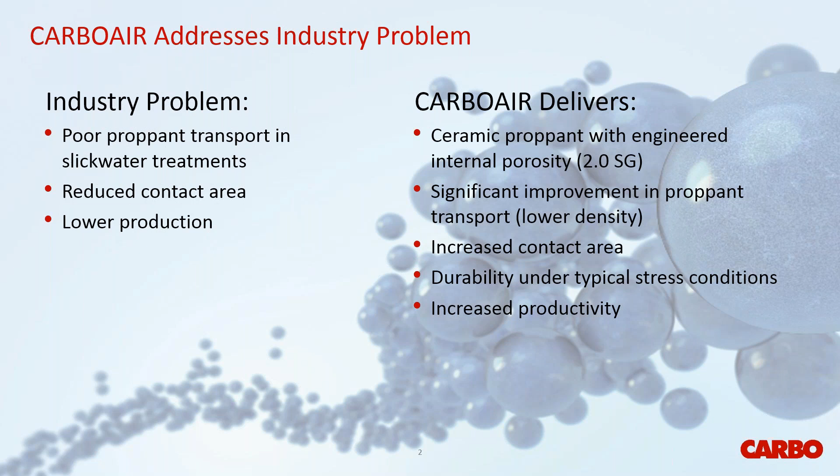One of our keywords we like to say is better shape than sand. So what does that mean? Natural sand has an angular tendency, so it packs tighter. That does not necessarily mean more length or more width. What it means is the roundness of a ceramic proppant has a looser packing, resulting in higher volume inside your fracture, utilizing the same pounds. I will show you these later on in this slideshow.

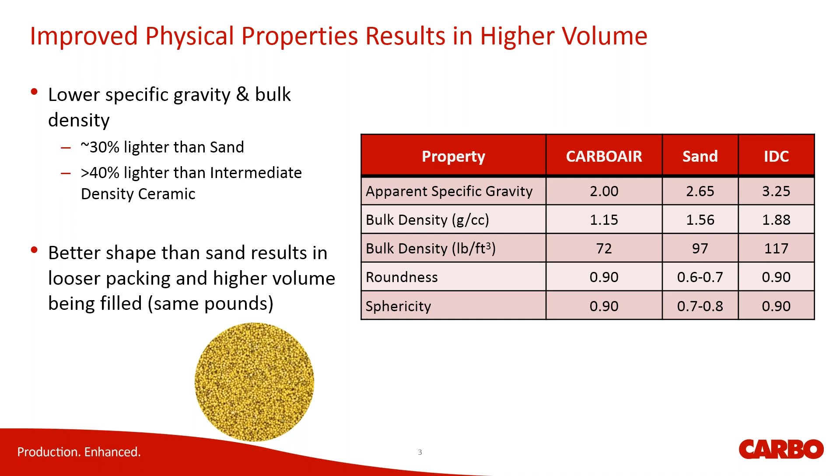Now, what can we do with this awesome proppant? Well, obviously it was designed for a slickwater fracturing environment. That was the main thing. We want to extend our frac lengths. We need more coverage. So we said, great, slickwater fracking is the key. How do we achieve this?

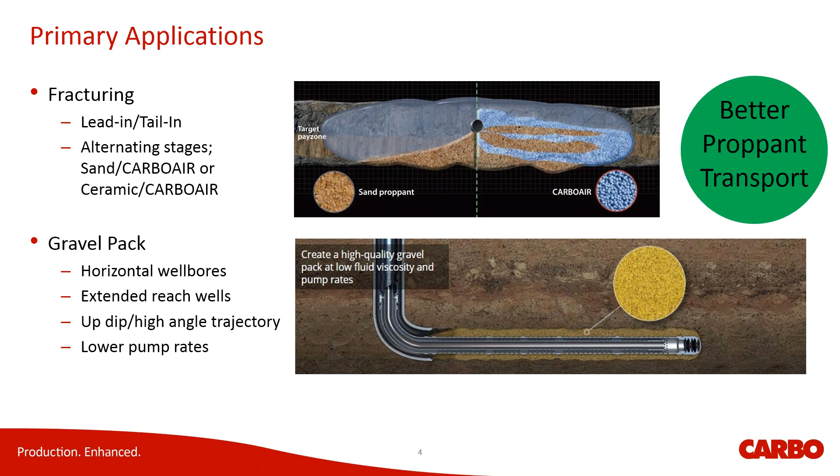So we thought, well, we can tail in like a typical ceramic. We can also lead in with it. We looked at other ways of using it, alternating stages, layering it in, alternating sand, alternating air. Beyond the fracturing world, we had to look at gravel packs, horizontal well bores, extended reach, wells with high angle trajectories, and wells utilizing higher pump rates and higher pressures. We can lower these utilizing Carboair, a lightweight ceramic.

So why does it work so well? Lower settling velocity. Here's a bar chart showing settling velocity in feet per minute on the left and a variety of proppants on the bottom. From left to right, you see the highest one, 30/50 sand. Comparable to our 30/50 Carboair, a 40% reduction. In the middle is probably the most common proppant used in the US right now, the 40/70 mesh. As you can see, Carboair is 40% less.

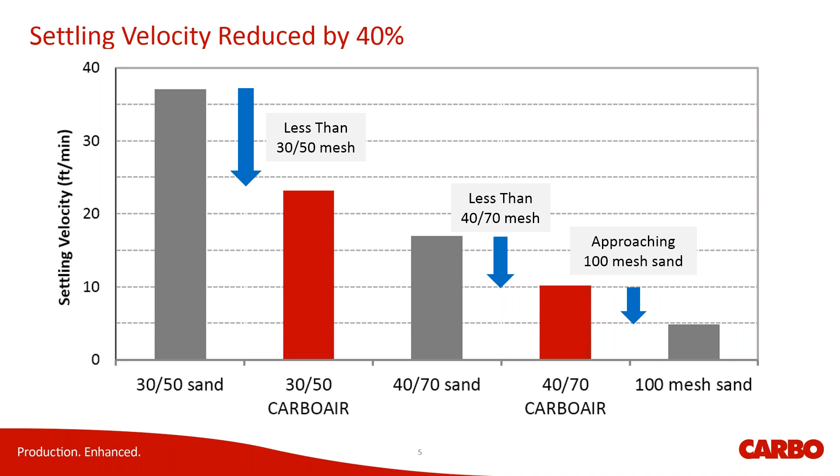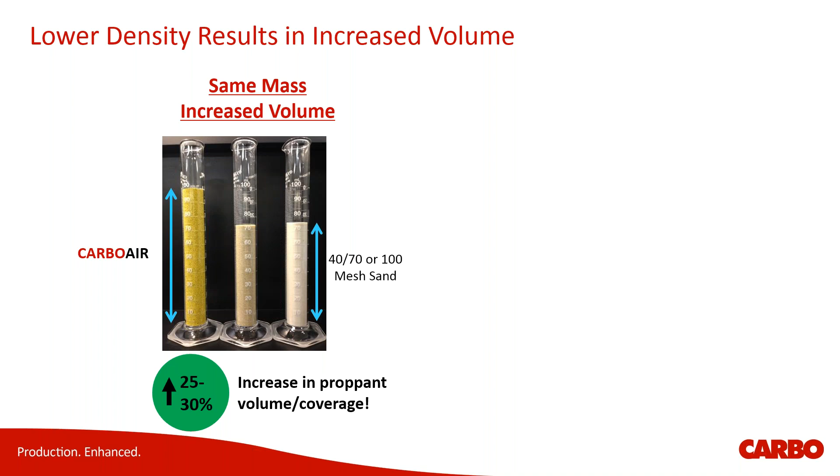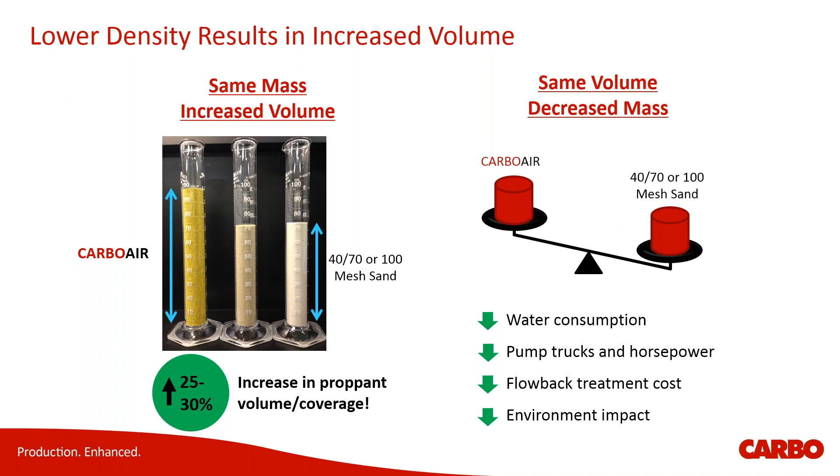Now we look at same volume, cubic feet, decreased mass. So the same cubic feet will result in less mass, but the same frac geometry. Ultimately, you get a 30% reduction in water consumption, flow back, horsepower, chemicals, and time on location. If you think of this as a single vertical well, it's probably not that significant, but when you look at it in a horizontal case, times 40, times 50, times 60 stages, that 30% adds up pretty quick.

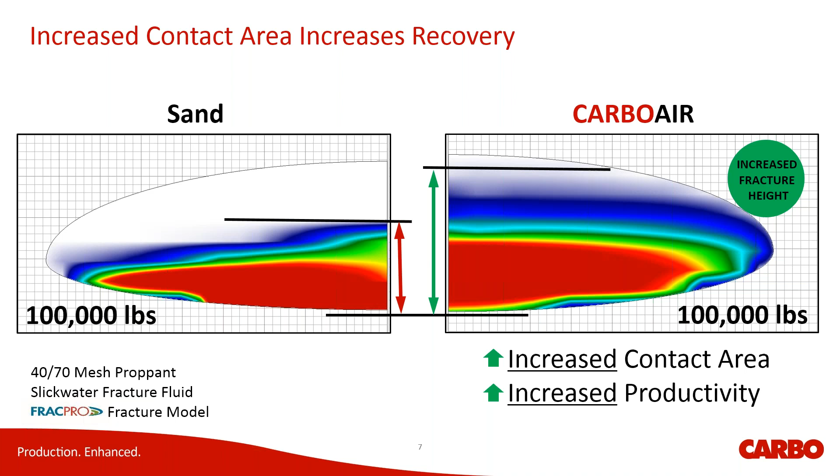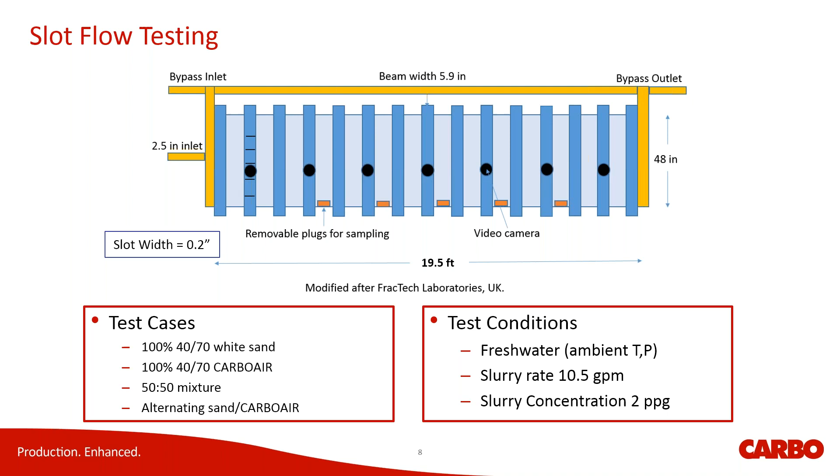Doing that, we realized we have this facility, so we might as well run quite a few more tests while we're here. The conditions were all the same for each, all utilizing fresh water, a 10.5 gallon per minute slurry rate, and a 2 pound per gallon slurry concentration. So let's show a video on how the slot flow test works.

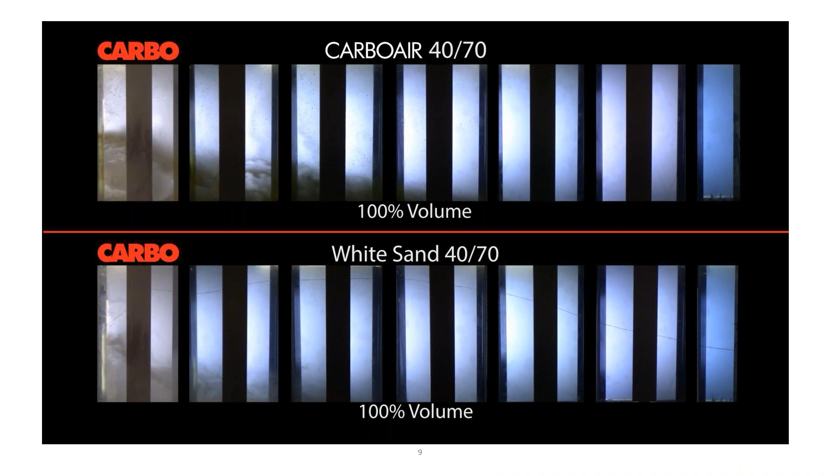On the top, you have Carboair 4070, on the bottom white sand 4070. Notice the 100% volume, these are the same identical frac, same cubic footage. Notice how light the Carboair looks in the fluid. The sand is already duning and rolling towards the bottom. The Carboair is floating across towards the back of the vessel. Remember, this is a 20-foot vessel.

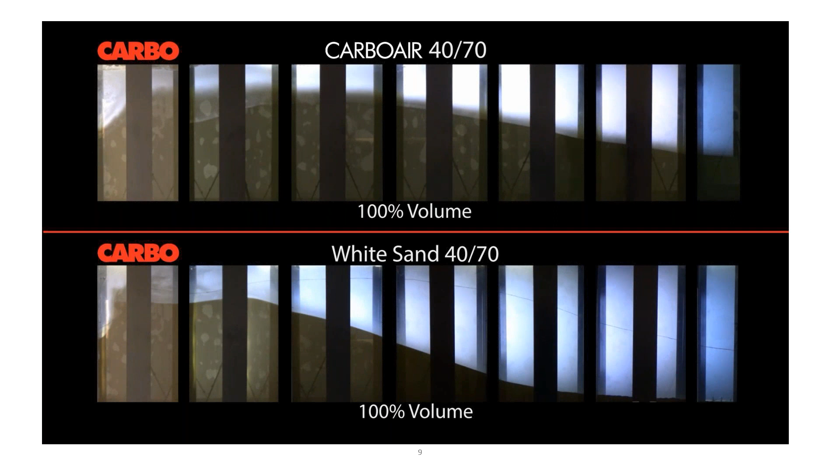This video is sped up a bit to illustrate what we're talking about, but as you can see, the sand has continued to dune and roll downhill while the air continues to float over the top. Remember, this is the same cubic footage, should be the same frac. Remember the 30% reduction in water and chemicals I mentioned? Now your Carboair frac is done, meanwhile your sand frac is continuing to pump: 30% more chemicals, 30% more water, horsepower, etc., more time on location. Think of this times 60 stages.

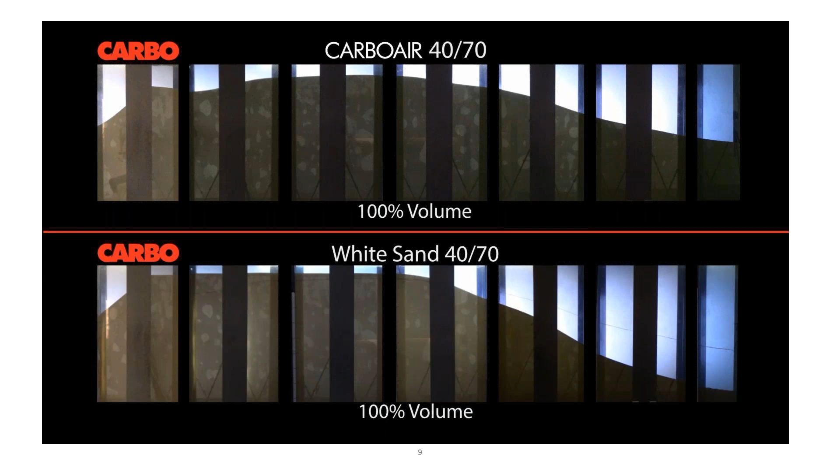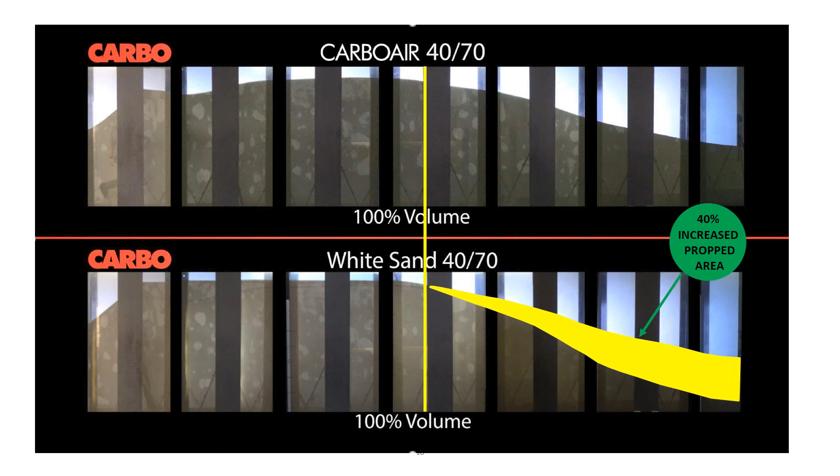Now that the fracs are completed, you see a visual of the frac dimensions. Remember the angular tendency of the sand? It packs tighter, but that does not necessarily mean more contact area. Look at the Carboair. What you don't see is in the discharge of the water and proppant while this test was going, 0% sand and 3 to 5% Carboair floated out of this fracture. Here's an illustration of what you missed in your increased propped area. This is a coverage comparison of what was done with Carboair versus white sand. Remember, same cubic footage, should be the same frac.

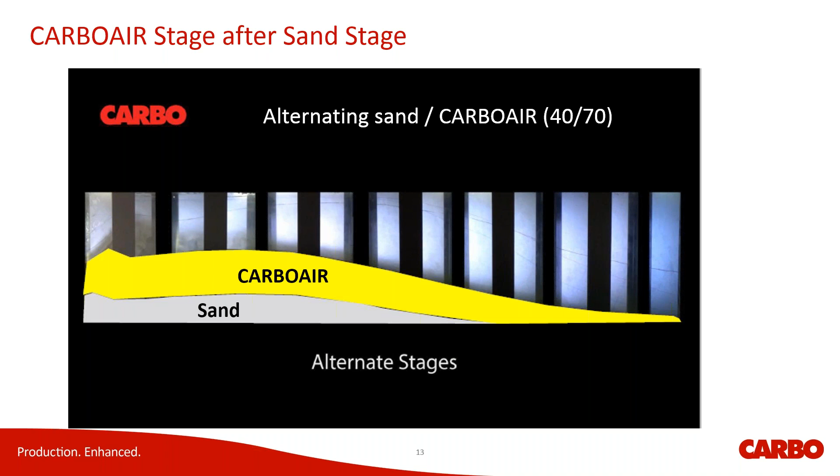Next, we're going to show you an example of an alternating stage frac that we did utilizing sand and air. These are as well, same cubic footage, same volume of sand, same volume of air. Started with sand, layering air, notice, all the way to the back of the vessel. Then we came over the top with sand, and our final stage was Carboair. You can see the illustration is similar to the design we achieved with 100% Carboair, this time layering in sand. Remember, same cubic footage here.

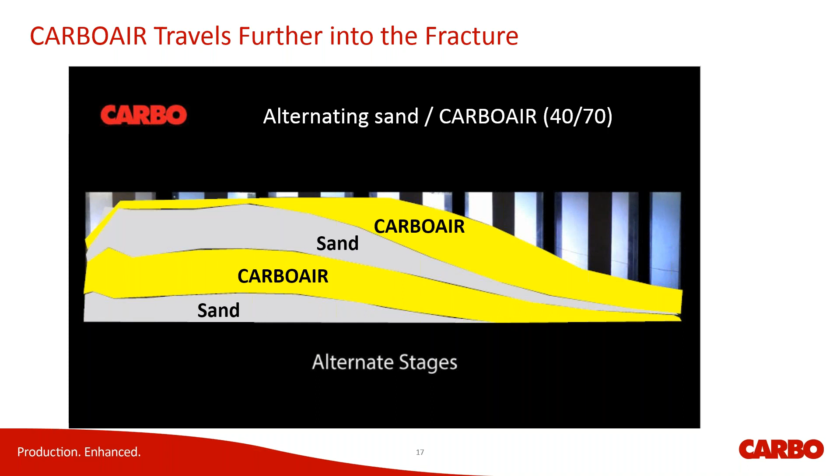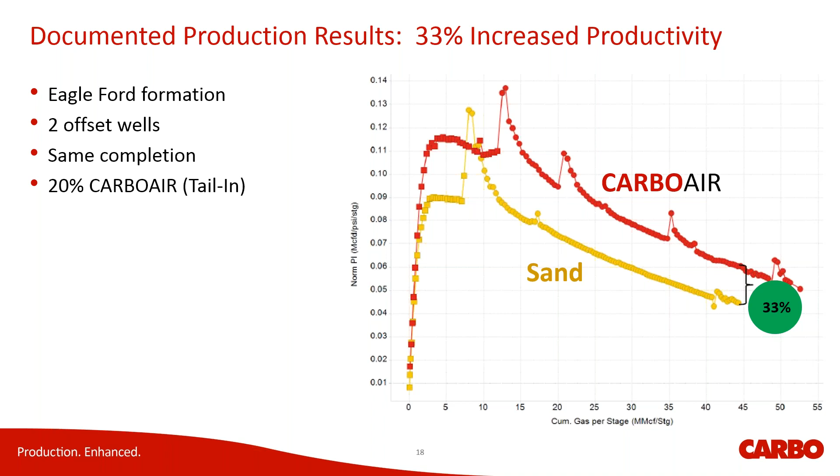Here are more examples of its success. Two more large unconventional basins in the U.S., one utilizing a tail-in, the other taking advantage of alternating stages using two mesh sizes of Carboair, 4070 and 3050. Remember the 30% reduction in water? That was the driver for this client in the Marcellus, in northeast U.S. They wanted a reduction in water, since water is extremely expensive to haul in and haul away.

So what did they do? They designed their frac 50% tail-in with Carboair, ultimately achieving less chemicals, less water usage, and less time on location. These two-week fracs, on average, we're seeing 1 to 1.5 days reduction in pump time.

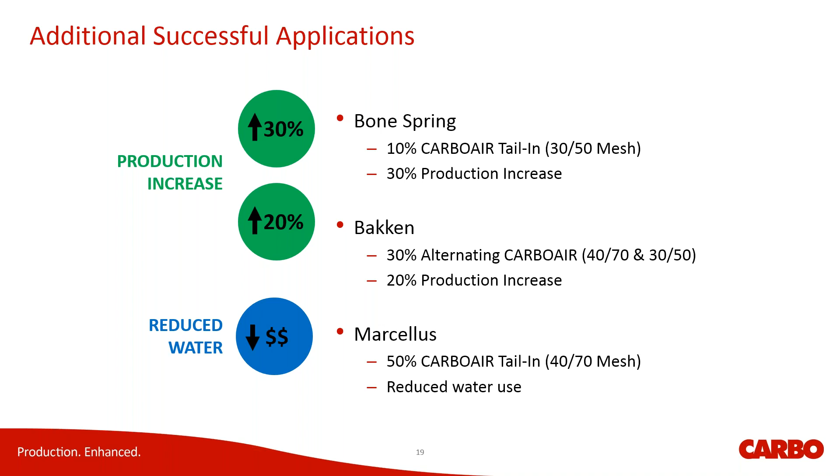Here's another oilfield example, gravel pack applications. What problems are you facing? Poor coverage using conventional proppant, high viscous fluids, higher bottom hole circulating pressures resulting in gravel packs growing into the fracture, bridging off, ultimately shutting down and not achieving gravel pack success. So what does Carboair do? It improves coverage using a thinner, less viscous fluid, lowering pump rates and pressures to achieve 100% pack with little impact to the surrounding formation.

We've done this around the world: North Sea, Trinidad, Egypt, even South Texas here in the U.S. With 40 plus gravel packs under our belt, we can say we have a 100% success rate.

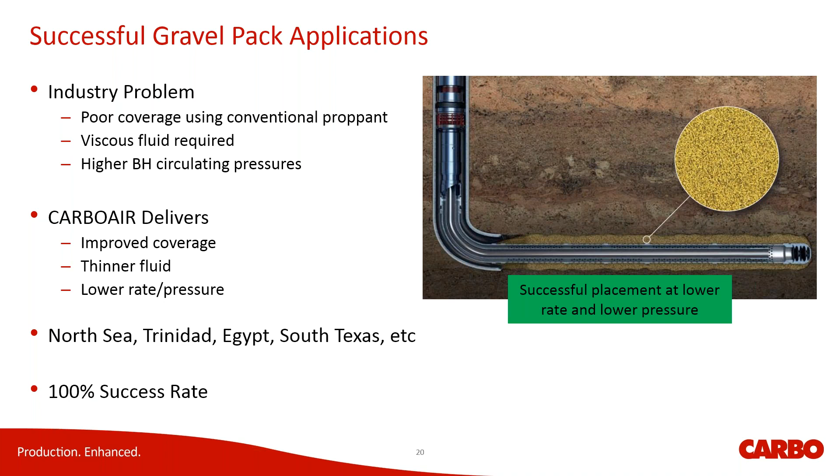Let's review this case study I mentioned in the beginning. This one was tricky: large, significant washouts, lateral length, and a toe-up horizontal wellbore.

When the engineer ran the simulations, it showed excessive pump rates and pressures required to achieve this gravel pack. Most of the simulations failed, so they contacted Carbo. What can we use? How can we take advantage of Carboair, the 2.0 specific gravity proppant?

We gave them the data on it. They ran the simulations, which came back showing a successful alpha-beta wave completion, with lower pump rates, lower pressures, and a lower viscosity fluid. After 27 hours of continuous circulating, the end result was a full annular pack with no bridging.

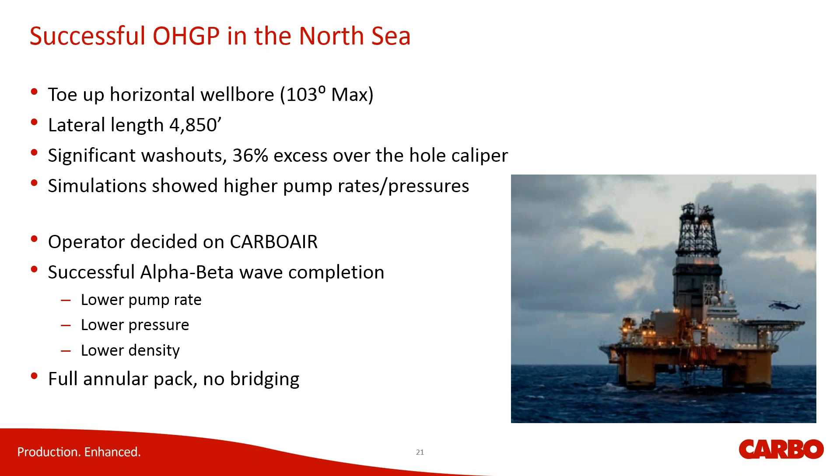So what does all this mean? This means it's a proven technology. We've implemented it in all the hydraulic fracture treatments and gravel packs. We've done this around the world in major shale plays, onshore and offshore. So you might ask, who's doing all this work? We have super majors all the way down to small private equity firms trying to take advantage of this technology to increase their productivity and contact area.

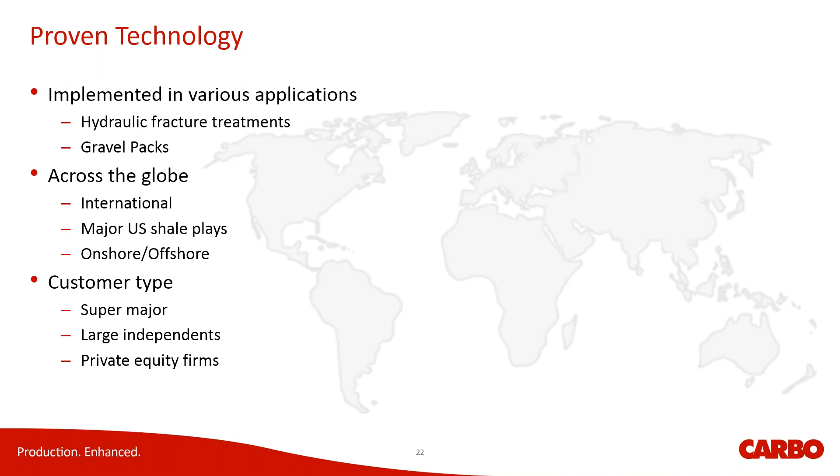In conclusion, operators had a problem: they needed improved proppant transport. We delivered 2.0 specific gravity Carboair, with a 30% lower settling rate and a 40% increase in volume and contact area. It's been deployed across the U.S. in all major unconventional plays, and across the world in high-risk, highly successful gravel packs.